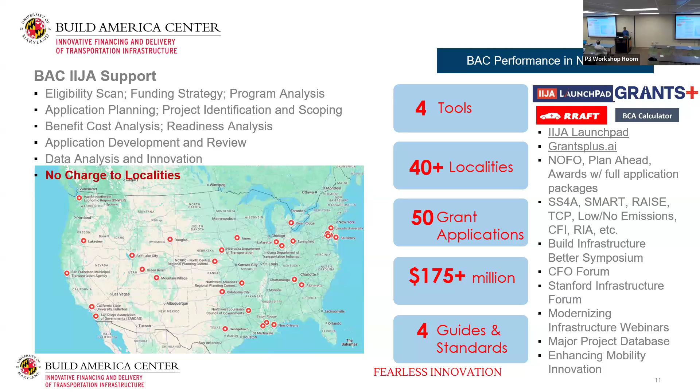Since then, we have been working on multiple projects. A few key activities launched were the IIJA Launchpad and Grants Plus AI tool, and we have helped in getting more than 50 grant applications for local and state DOTs, securing more than $175 million worth of federal grants for these agencies.

One of the key activities, known as Build Launchpad, has been rebranded as IIJA Launchpad. It has coverage of recent awards and federal grants across the US, looking into 1,000 plus awards, 4,000 plus localities, and key application documents that were successful in getting the federal grant awards. The website is balaunchpad.com.

Another tool recently released is called grantsplus.ai. It's an LLM-based tool which agencies can use to see how easily they can avail federal grants, looking at local matches, funding sources, innovative finance, and accelerated delivery.

We do conduct lots of capacity building workshops to agencies, to student community, to industry professionals in terms of workshops, symposiums, seminars, webinars. In 2024-25, we had around 25 plus events happening across the US in multiple modes, and 1,000 plus attendees were part of these activities.

We have a YouTube channel. BAC holds a YouTube channel. You can search for Build America Center YouTube channel. It has 60 plus short videos on grant application procedures, how to work with FHWA, looking at the state infrastructure bank, regional infrastructure accelerators, and other topics.

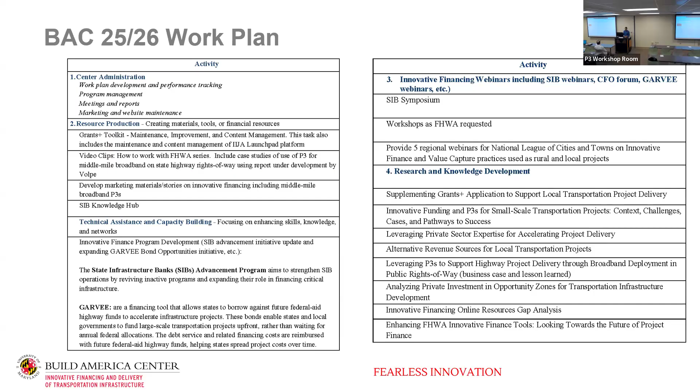For the 2025-26 work plan, we recently got this approved, and multiple projects have been taken care of, including alternative revenue sources for local transportation projects, leveraging P3s, innovative financing resources, and enhancing FHWA innovative finance tools.

Our center director, Qingbin Cui, could not make it today. He can be reached at cui@umd.edu or bac@umd.edu.

One final update: BAC has recently published a value for money analysis principles and standards, because it was part of IIJA principles that each project should undergo a value for money analysis. BAC has released a report and checklist for how to conduct value for money analysis.

That's about BAC. So now I invite Professor Sinha to give a brief keynote. It says keynote address, but it's not really a keynote address, it's just an introduction. For those of you who do not know me, I've been at Purdue for many years, 51 years. We have visited many of these things we are talking about for years and years.

We work with the Indiana Department of Transportation, mainly through the Joint Transportation Research Program. As a matter of fact, I take credit for the highway charges we have in Indiana. That was set up by us. People often wonder what engineers have to do with financing, but there's a lot of engineering in it. We have to figure out exactly how much to charge whom, truckers versus automobiles. There comes the engineering: how much damage the different vehicles create, and how much it costs to fix that damage through maintenance and rehab, you have to allocate them. So there's a lot of art in it, also science.

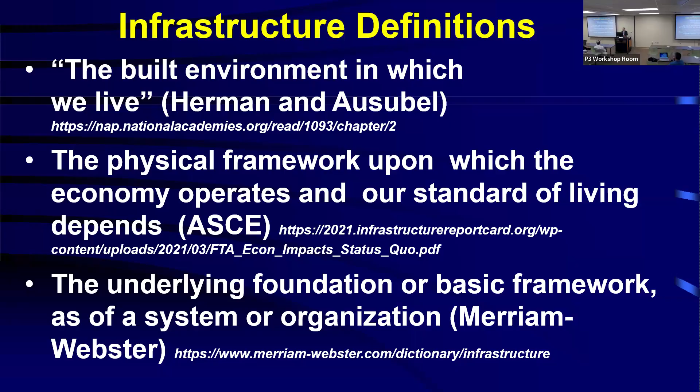ASCE has a good one, and even Merriam-Webster has very good definitions, and this is one of them. And how about financing through public and private?

I think originally, not too many years ago, we had the Soviet Union, the former Soviet Union, where 100% of their infrastructure was publicly financed without involving the private sector, not even as contractors, because the contractors were also public. So all the contracts, instead of competitive bidding, were awarded through negotiations. The idea was to give a piece of the cake to everybody, spread the money, and try to do the work that way. After so many years, it was found out that it does not work that way. There are many issues.

We all know that the end of 1991 was the fall of the Soviet Union. And then the World Bank at that time invited a few people to constitute a new department working with the 15 republics of the former Soviet Union.

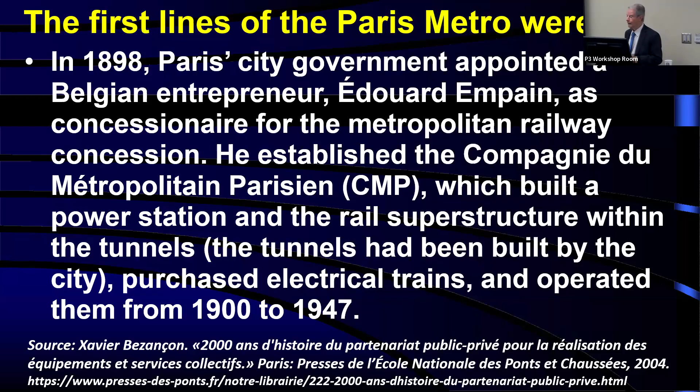Some examples: in 1898, Paris city government appointed a Belgian contractor entrepreneur, Edouard Empain, as concessionaire for the metro of Paris. There's a very good description - I have not seen any translation, but in French there's a very good description by Xavier Bezançon, '2,000 Years of PPP History.' So if you want to know more, I suggest you have a look there.

Years ago, I was asked to help the Norwegian Public Road Administration launch a huge PPP program on their west coast. If you remember the map of Norway, the west coast is famous for their fjords - the sea, the North Sea, goes into the continent. So what happens if you want to build a north-south road? Norway wanted to connect through PPP, north-south on the west coast, so you have to cross those fjords. It was a huge challenge, and they asked me to help structure it as a PPP.

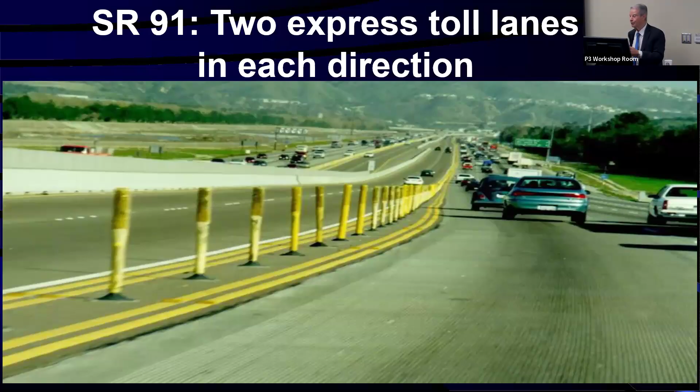Not peak hour, you go there, so you can drive very comfortably in the express lanes because basically there's no traffic, so you are paying for almost nothing. A little later, during rush hour, the price is higher - it's dynamic pricing. The price now is higher, but still it's really worth it, although many drivers believe it's not. So if you choose to pay, you take the express lanes. If not, you have huge congestion. So it's the market working.

Sam, going back to Ghana, you saw this before, and you have been there. I know - this was my first World Bank mission to Africa. I went to 3 countries: Mauritania, Senegal, and Ghana. My first mission was June 1986, the year I joined the World Bank - my first work travel to Africa. And in Africa, one of the challenges we had is that the north-south road, as you know...

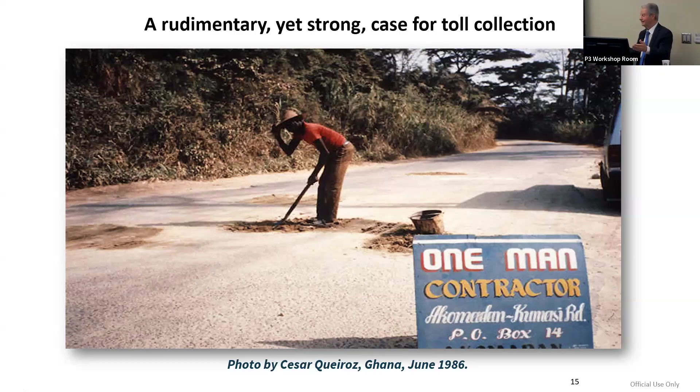Okay, finally we have a definition. So what's a P3? A long-term contract between a private party and a government entity, for example the Department of Roads or Highway Authority, for providing a public asset or service, in which the private party bears significant risk and management responsibility, and remuneration is linked to performance. So if the road is in poor condition, the government may not pay. That should be built into the contract. So a good PPP contract will have a set of performance indicators that must be met by the private sector to get their money.

The life of a PPP project typically has been between 20 and 30 years. Could be longer. The principle is that it should be long enough for the private sector to have the incentive to invest well, to do a high quality initial construction, because they'll be responsible for maintenance for many years.

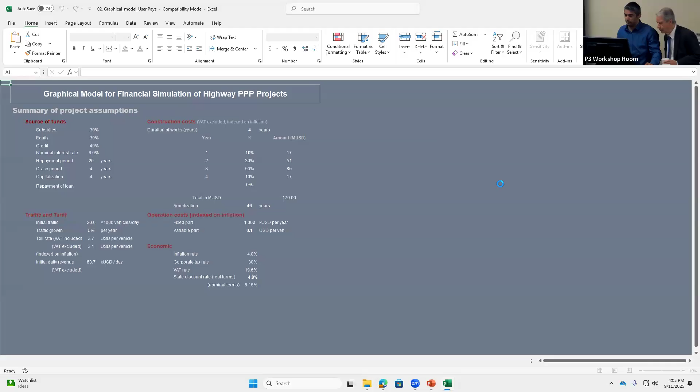So we are talking about the file graphical model User Pays - the graphical model, operate V3. This already has macros enabled and ActiveX controls enabled. This will be the starting screen, and you have 5 sheets in it called data, cash flow, debt, dividend, and results. We start with cash flow, where you can adjust all the key parameters - concession term, construction cost, road length, split up of the construction, operating expenses, and other details.

What we want you to do is adjust the information below on the concession. Could you do the first one - concession life, it is 50 years now. Let's try to reduce it to maybe 30. Everybody, if you have it open, can you try to start with the concession life? Let's put 30 years, can you change it to 30? If you get a bad message saying you are not a good person, then you have to close the model and reopen everything again.

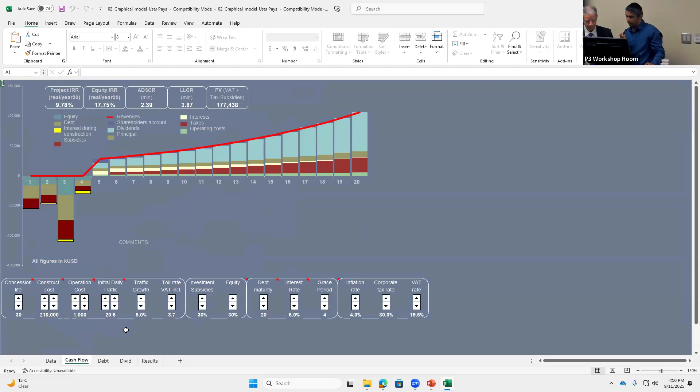So the values, and sorry, where do you adjust the concession period? Is it on the first slide? Yes, first. Concession period and most of the parameters are in the second sheet, in the cash flow statement below: concession life, construction cost, operations cost, daily traffic, and remaining. I've seen it, thank you.

May I ask, road length, I've not located that yet. It's probably very obvious, but I'm missing it. Sorry, I didn't get you, which document? Road length, the parameter road length parameter, where is that set? Oh, the road length is not in the model.

We wanted to keep the model as simple as possible, to be user-friendly. As a result, some of the calculations you have to do outside of the model. So we will get to that point, but for the time being, please focus on including in the model all the data that was provided, so that you are adjusting or adapting the standard model to your project. That's how you make it fit to your project. In this case, the capital cost takes care of the road length, so we don't need to adjust the road length. The capital cost is indicative of the road length, it applies to the entire road length. Thank you.

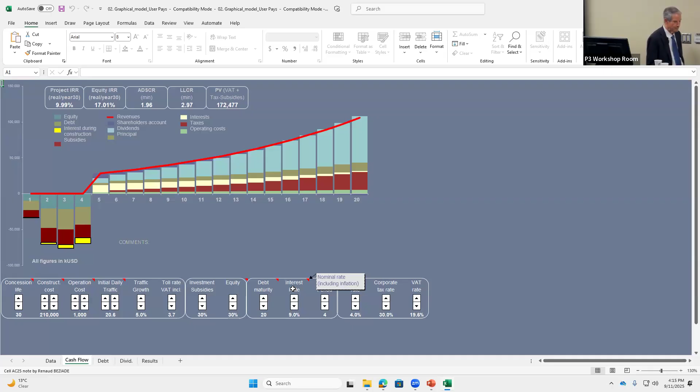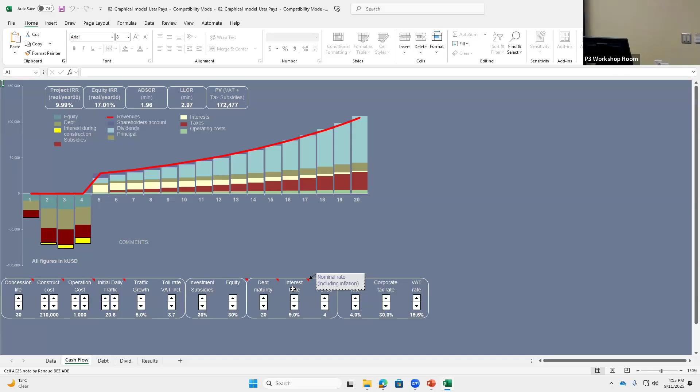Could you tell us where the field is for the loan repayment period? The loan repayment period, you need not include directly, but your total debt maturity can be 19 years. The debt maturity of 19 years is a sum of the grace period and the repayment period. So there is no specific field for the loan repayment period as such, you only need to key in the grace period and the maturity.

Could you go over again how the construction cost percentages work? I'm having trouble figuring out the first years. For the construction period and the cost, go to the duration of works in the data sheet. There are large boxes, and if you click on the left of the large box it reduces, and if you click on the right it increases. You can keep year one unchanged, there is no option to change year one, but year 2, 3 you can change.

Perfect. Thank you. Hello.

Hi, can you please check the repayment period? It seems the subtraction is not working. For debt maturity minus grace period, it's not giving me 15. Grace period is 4 years and the debt maturity is 19 years. The repayment period shown in data is 19, but it should be 15 -- the repayment period is 15, you added the grace period. You have 19 including that, yes including the grace period. The subtraction formula needs to be corrected.

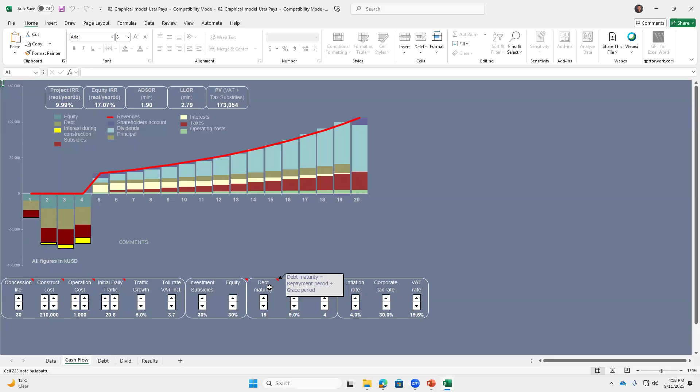So you were talking about the repayment period in sheet 1, right? It still shows 19 years because I think here it covers the entire period of repayment, so it need not change -- these are non-editable fields, so it can stay like that.

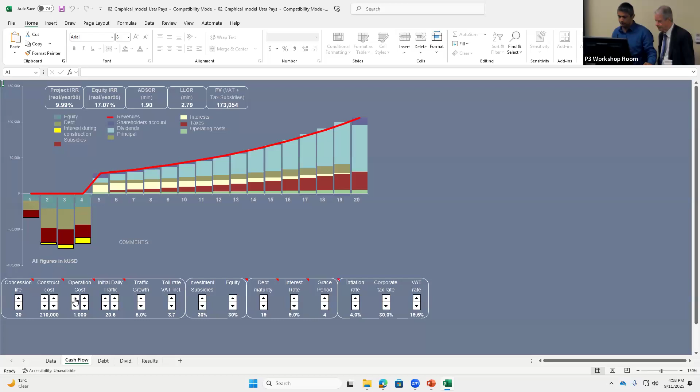Hello. Yes, this is Andrew from Uganda. I want to know, how do you input the discount rate?

The state discount rate is in the first sheet, the data sheet. It has to increase to 8%. In real terms, it's 8%, so we increase it to 8. So in nominal terms, it will be real terms plus the inflation rate, plus a factor combining the real terms and the inflation rate. So you will get 12.32.

Hello, please. Where can I reduce the operation cost? I've gone so high, I want to bring it down to 1,000.

You can increase it to 10 million. Okay, operation cost 10 million. Okay.

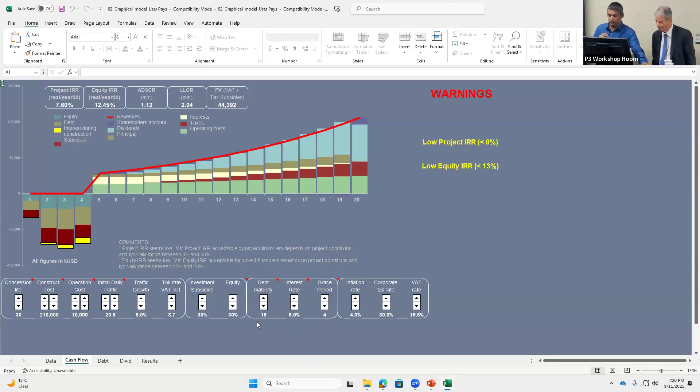Where is the loan repayment period adjusted? Can you remind me of that? The loan repayment period is adjusted in the grace period and debt maturity. The loan repayment period itself does not have its own table. You can just adjust the debt maturity as 19 and grace period as 4 years.

Thank you. Sorry, I'm a bit confused with the operation costs because I put 10 here, I changed it to 10, but I see the figure of 10,000. Do I need to remove these 3 zeros, so it remains only a figure of 10? On the second sheet, operation costs.

Hello? All figures are in thousands, so it's 10 million. Ah, okay, okay. Okay, KUSD. Thank you.

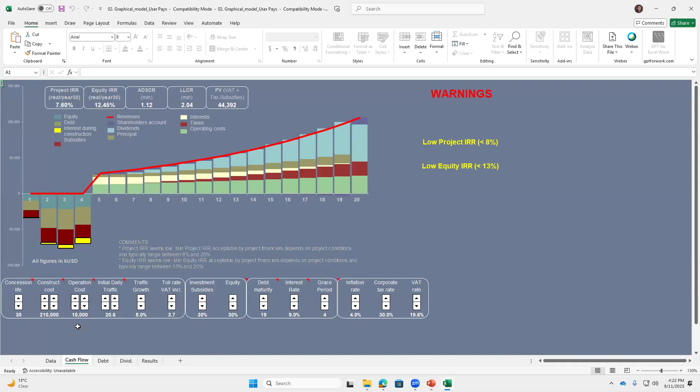Please, where do I reduce the grace period from 5 years to 4 years? There's a section called grace period where we can change it to 4 and 5.

The private sector will not get any loan with a grace period lower than the construction period, so they will be relying on that, rather than calculating a lot of the principal without proper money calculation. So, okay.

4%, 30%, 19.6. Okay.

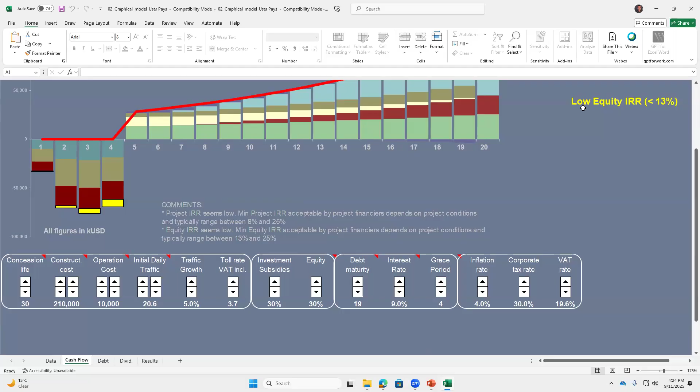Could you explain the difference between the project IRR and the equity IRR?

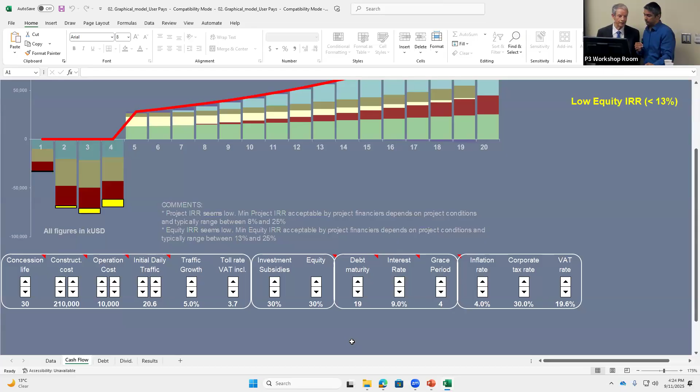Yes, we'll come to that shortly. Let's first customize the model to our project. Okay, so let's enter all the data. Please don't do any calculation so far. If we enter all the data correctly, then we can compute all together, and we're going to get to the right answer.

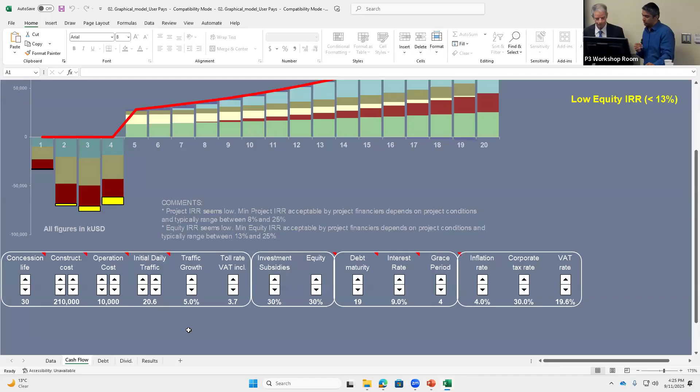So let's look at the second sheet, change the equity to 30%, and investment subsidies is 0, which means we will have a debt of 70%. That's right. And traffic composition 70, 25, and 5.

Before that, initial traffic for year 1 is 20,000. So far, let's only put the 20,000 because the other data we don't need for the time being. We are entering data only where the model requests the data.

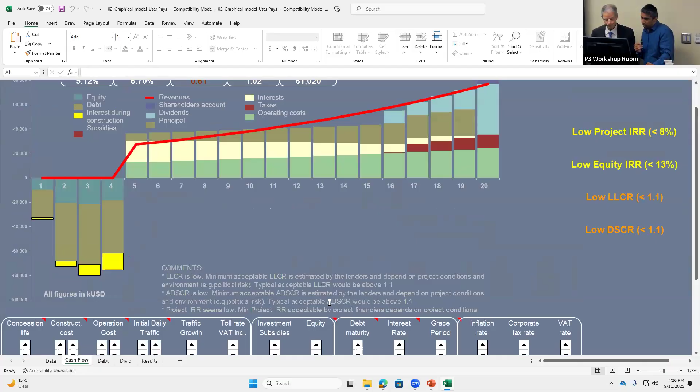20, and traffic composition 70. Traffic growth 3%, we have entered. And traffic split, no need to change. Okay, traffic split, you can skip, not yet need to change, so we don't need that for the time being.

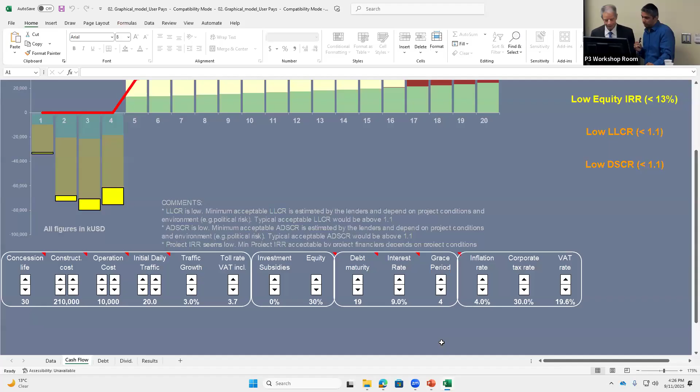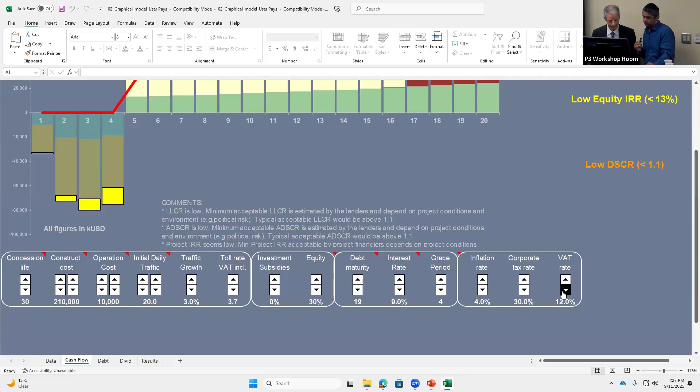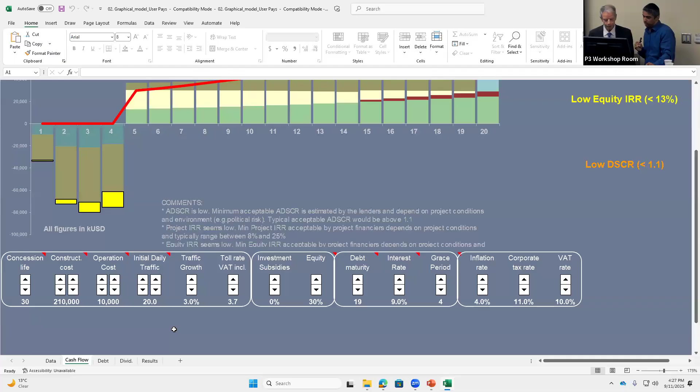Okay, and amortization period, you have to go back to the data sheet, and it is 26 years by default. No need to change.

Has everyone reached the stage of setting up the model for our project, before going into the targets? Yes, before worrying about the target, let's make sure that we have all the data.

So, the cash flows, you can check here at the bottom line. You should have all this data. Oh, the toll rate does not matter - we have 3.7, but it doesn't matter because the toll rate is going to get affected. So don't worry about the toll rate. But all the other data in the cash flow, at this stage, we need to get all on the same page.

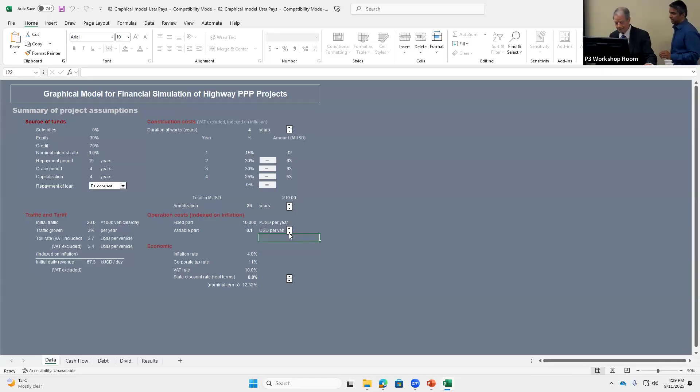Oh, variable part should be 0. Yes, thank you, good eyes. Colleagues, please remove it. Look here, variable part of the maintenance cost should be 0. So instead of 0.1, I should have 0. I think this model works only with the fixed part. Oh, I got it. Good, so yes, it should be 0.

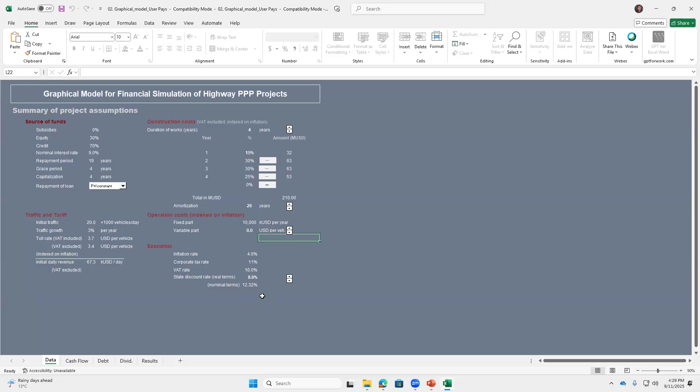What else? You have 12.32%. So in practical terms, the state's rate in nominal terms should be 8 plus inflation. 8 plus 4 is 12%. The 0.32 is a refinement, obtained by the product of the entire formula. The correction is the product of inflation times the rate in real terms.

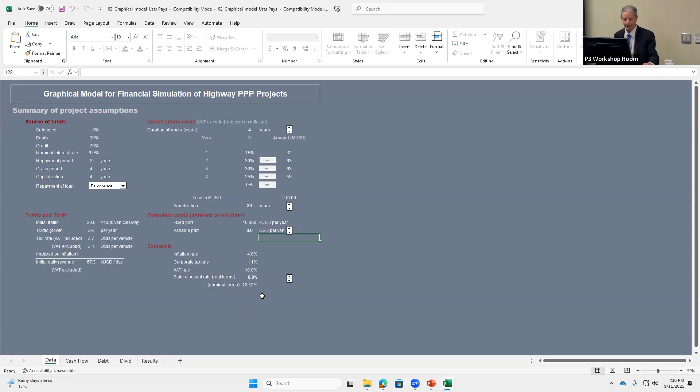And I have a question. Yeah.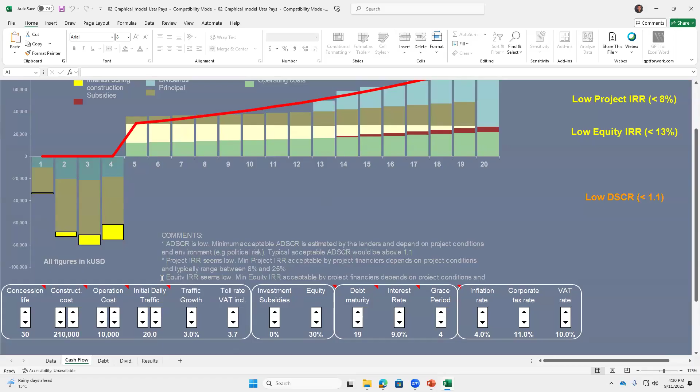And where do we enter the traffic composition? Traffic composition, no need to enter in this, the total price - I think there's something wrong with the microphone, we can't hear you. Sorry, the traffic composition, no need to change now. You need to look only at the total volume of 20,000 in the initial daily traffic.

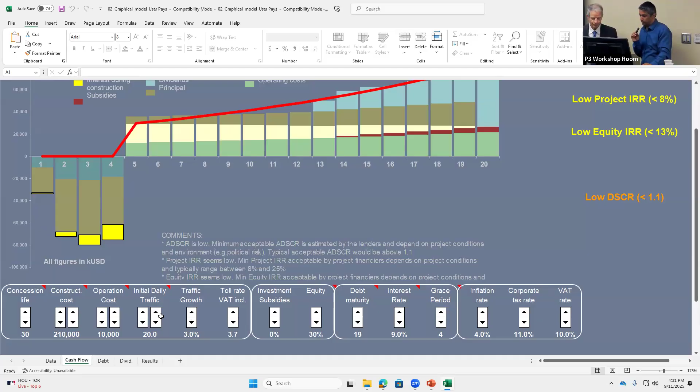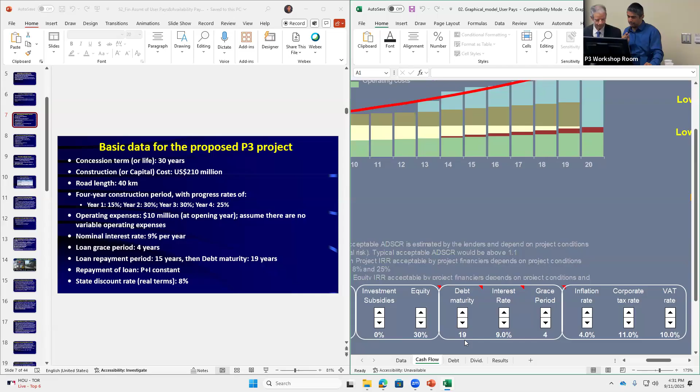Let's do a final check on the cash. Okay, so if I look at these sheets, I'm finally checking: concession life is 30 years, construction cost 210 million, 4-year construction split 15, 30, 30, 25, operating expenses 10 million, nominal interest rate 9% per year, loan grace period 4 years, debt maturity 19 years, repayment of loan is under P plus I constant, meaning principal and interest total remains constant in a year.

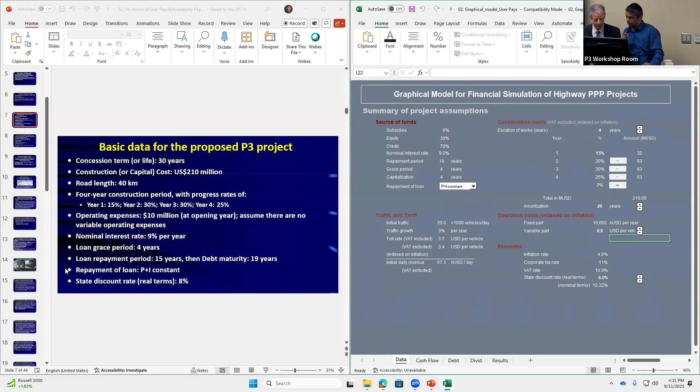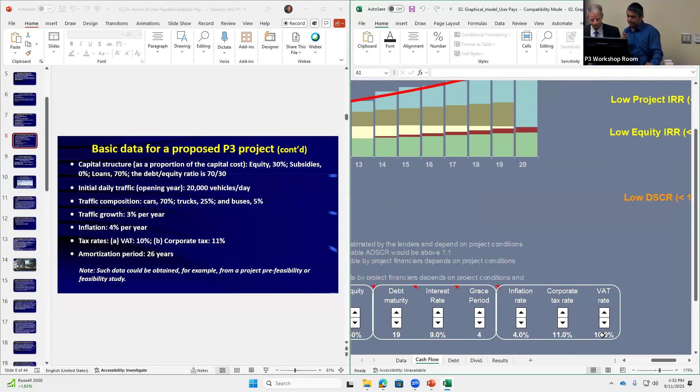State discount rate kept as 8%. The next sheet will have a capital structure of debt equity as 70-30. Initial daily traffic will be 20,000 per day, traffic growth of 3% per year, inflation of 4% per year, corporate tax at 11, VAT at 10, and amortization period 26 years in the first sheet. So basic model, the project has now been set for our conditions.

So now the first question was, at what toll rate? Financial indicator targets, okay. So we are looking into the financial indicator targets. Maybe you can explain that, thank you.

We can't hear you online. Can you hear now? That's much better. Thank you, is it okay? Yes, yes.

So I was saying that now we have the two targets: return on equity at least 12%, and at least 1.2 for the ADSCR, annual debt service coverage ratio. So with those two indicators in mind, let's memorize them. So we can go to the cash flow. Let's go to the cash flow.

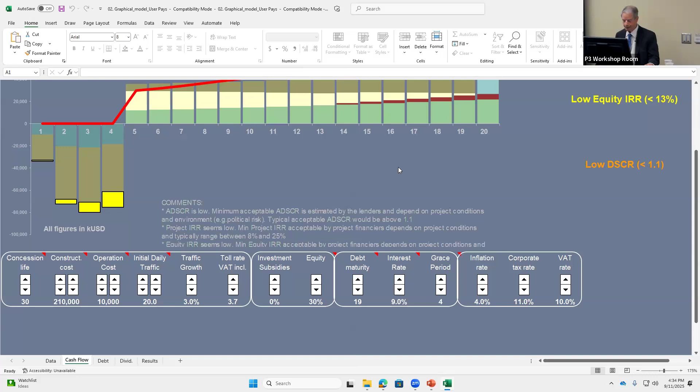So if we have all the data, let's see the indicators. We're not talking about the other indicators, like project internal rate of return - forget that for now, it's helpful but we don't worry much about it. Our two critical indicators are only these two: the equity IRR, which is 9.69, now it's too low. And the ADSCR - we need 1.2, and it's now 0.74.

So what do we have to do to get the right indicators? The only variable now - we have an equation with only one unknown, which is exactly the toll rate. That's the unknown. What's the minimum toll rate required? So 3.7 is too low because the two indicators are too low.

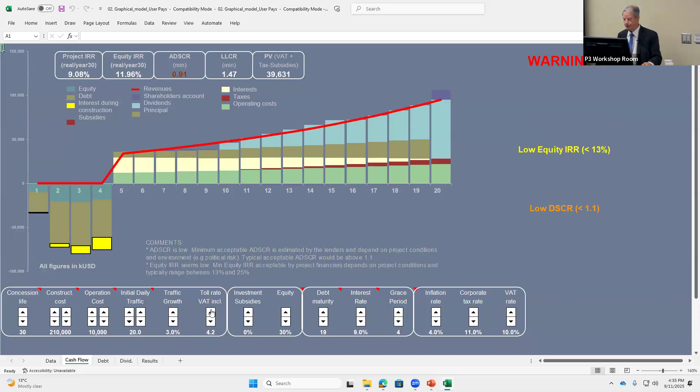So let's increase, and you can increase with me. Let's increase the toll rate so that we can increase the two indicators. The equity IRR is now 15.29, but I keep increasing because the ADSCR is not good enough. So I have to increase more.

Oh, now I'm in good shape. You see, we have to check the minimum. Now both indicators are above the threshold required - equity IRR and ADSCR. But let's see if I can go one notch down, because the question is, what's the minimum? But if I go one notch down, ADSCR is 1.19, so not enough. Let's go up.

So I have here a toll rate of 5.1. How many got that toll rate? 5.1, 5.1, okay we're unanimous. Congratulations in person. How many of the 200 online? We have several online colleagues - did you get 5.1 toll rate? Yes? Okay, excellent, congratulations to all of us. We got it, 5.1. So how are you doing time-wise?

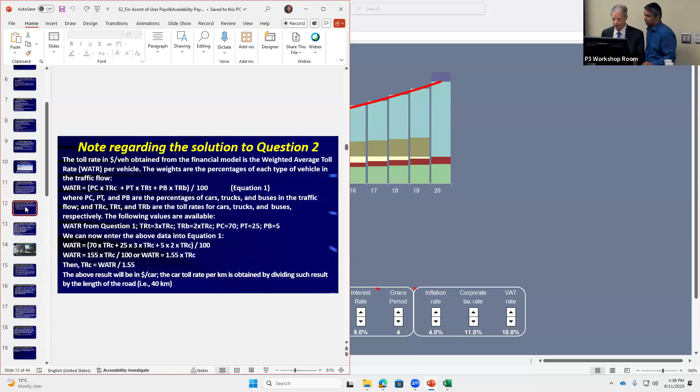So let's go to question 2. Please estimate the minimum car toll rate. Now we go to those percentages of cars, percentage of bus, percentage of truck - the car toll rate in dollars per car. I also want the dollar per car kilometer. So if I find the dollar per car and divide by 40 kilometers - I think we had 40 kilometers - I can compute the dollar per car kilometer, okay?

For the project to be able to attract private investors, please assume the following relationships between toll rates: average truck toll rate, assume that will be three times the car toll rate, and the average bus toll rate is going to be twice the car toll rate. So keep in mind this equation, 3 times for truck and 2 times for buses. Next.

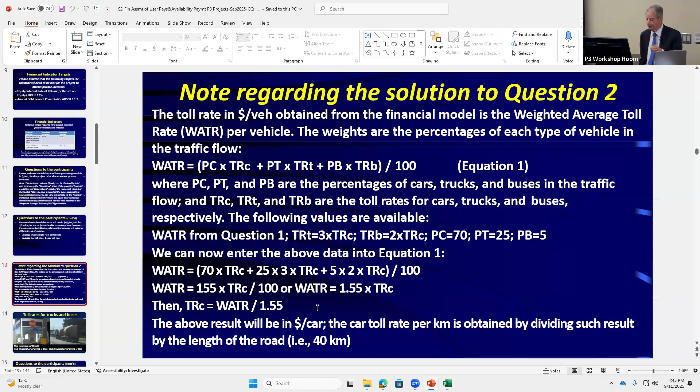Countries differ in terms of equivalence between cars and trucks, between cars and buses. I assumed here that it's a simple number. No, we assumed 3 times for trucks and 2 times for buses. But it depends on the country. Like in Brazil, for example, in most of South America, the relationship is based on the number of axles.

So here, the toll rate for commercial vehicles is based on their axles, same as the toll rate for a car. A simple equation: the toll rate for a truck is the number of axles times the toll rate for a car.

And other countries have different approaches, like here in the US, different concessions have different equivalencies. In South America, it's mostly standardized. In Europe, you have variations country by country.

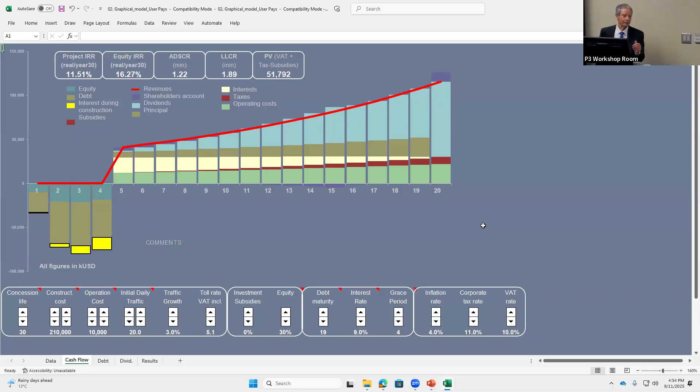It depends on the number of vehicles per day, and you use a fictitious toll rate, which is agreed during the bidding process. This means the private sector will have money each year that may be different because it depends on the traffic. It was the first major highway in Latvia, between Sigulda and the capital, Riga.

And so there was no environment, no acceptance by the private sector of shadow toll. So the only option became the availability payment, which is made by the government irrespective of how many vehicles per day. Okay?

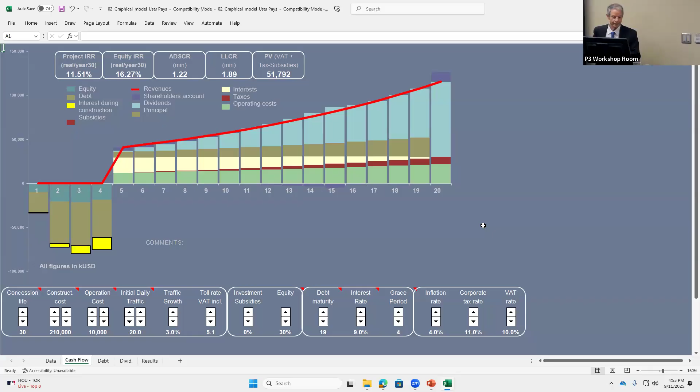Colleagues, I think we can move. I'm very happy. Let's move to, please help. Let's move to availability payments.

For that, I request you to open the next sheet, the sheet titled Financial Model for Availability Payments, number 5.

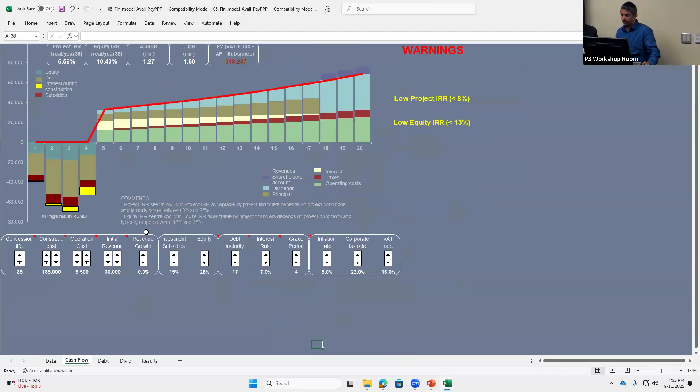Okay, the process, the larger bit. The process is almost similar to what we did last time. You will be having a set of parameters.

So let's go through the question. You want to explain the concept? Yes, I think we do. Let's do a refresh here.

Availability payment is a form of PPP where the public sector pays its private partner, the concessionaire, through regular payments, usually annually, could be half-yearly, during the operation and maintenance phase of the contract.

Based on the PPIAF World Bank Toolkit for PPP roads and highways toll road financial model, which you already know, we developed a model to assess financial feasibility of availability payments, which is applicable because there's no toll rate involved. So it's applicable to roads, rail, airports, ports, schools, hospitals, buildings, and prisons.

A numerical example - let's go to the numerical example. Question 1. To answer any question, the first thing we have to do is enter the data for this project, but let's see the question first.

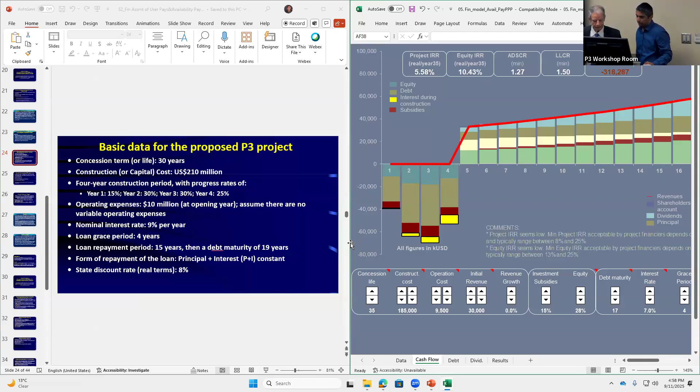Okay, I'm gonna - do I have some now? Yes, yeah, okay. Let me dictate to Deepak and he's gonna enter it into the new model. So concession life, 30 years.

Construction capital cost, 210 - I saw that number before. Okay, 4-year construction period. Split - forget the first year, go to year 2, 30%. Year 3, 30%, and year 4, 25%.

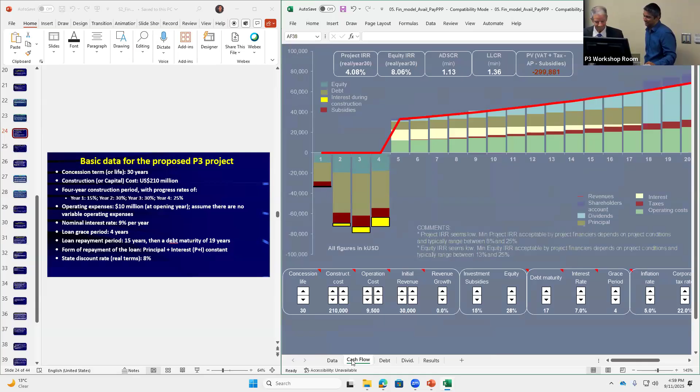The computer is very smart - it knows that the sum should be 100, so it computes year 1. We got it? Yeah, can we go to operating?

Operating - this operating expense is O&M: operating, maintenance, even rehabilitation, annual equivalent. So operating and maintenance expense, 10 million. There are no variable operating expenses.

I think we already - can you see the, yeah, we don't - I will eliminate, okay, good. And nominal interest rate, 9%.

Nominal interest rate, 9%. Loan grace period, 4 years. Loan repayment period, 15 years. Debt maturity, 19 years. It's already there.

Form of repayment of the loan: principal plus interest, P plus I. What's the other option? Can you try linear? Let's go to debt. You see, if linear, it decreases like that.

If you put P plus I, it means the principal plus interest is constant. Fixed EMI every month, fixed payment every month or every year. Usually it's a year. If you buy something by credit, you probably pay monthly.

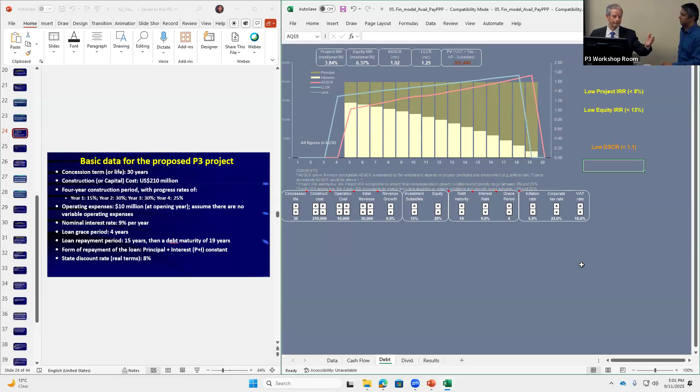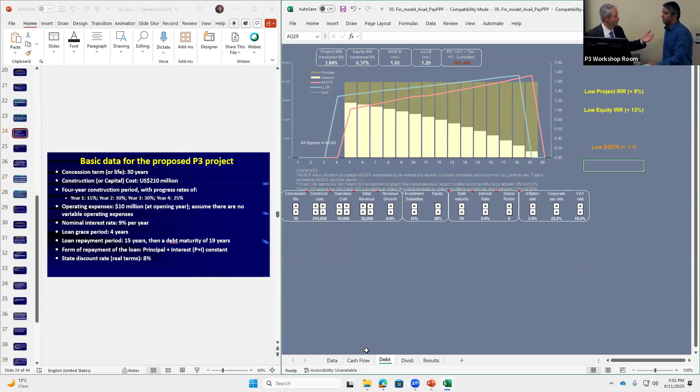But when we talk about infrastructure, the scale is bigger, and usually we're talking annually. When we did calculations for the Federal Highway Administration, they didn't like this model. We had to split into half-year units because they wanted to structure their financial models that way. But as far as I'm concerned, the rest of the world is happy with 1-year units, except in India, where payments are made every 6 months.

Discount rate. State discount rate, 8%. So 8% state discount rate, real, 8%.

And inflation, how much inflation? We didn't do inflation yet. Inflation 4%. So we have to correct for inflation, 4%.

Now we have the capital structure. So investments, subsidies are 0. Subsidy is 0 and equity 30%. The computer does not want you to add the debt because it knows that the sum is 100%. Debt plus subsidies plus equity is 100%, so you stop there.

So I think we entered everything. Revenue growth rate is 0. Corporate tax and VAT. Do we miss anything? Yes, the tax rate. Corporate is 11% and VAT is 10%.

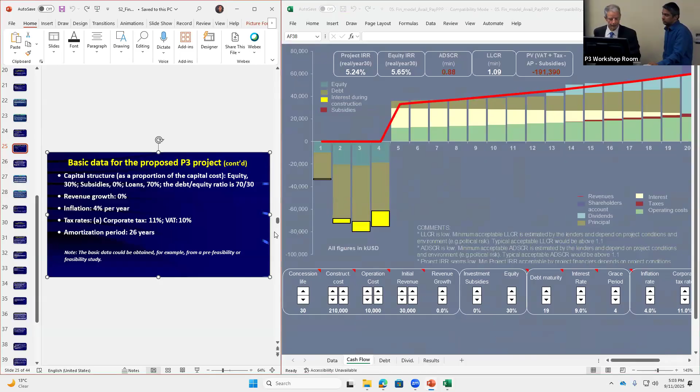Yes, so I think we entered everything. Everybody on the same page? I think we entered all the data. So maybe let's enlarge now the cash flow, and let's see the indicators, the constraints.

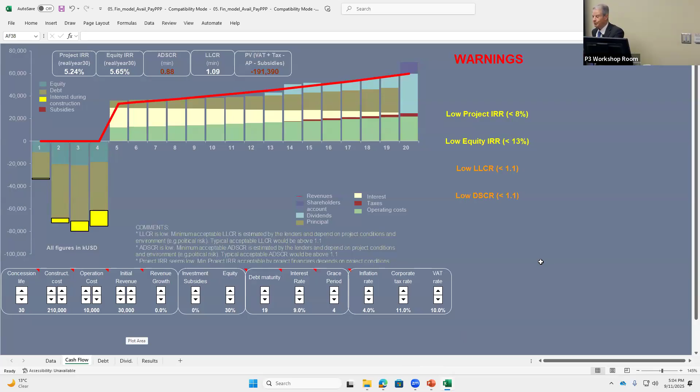We want the constraints to be the same as before. We know those numbers: 1.2 and 12. In your view, is this exercise for a developing country? Both indicators are relatively high, so yes, it's a developing country. Okay, so let's do the calculation.

So the indicators are not very good. Equity is only 5.6 and ADSCR is red. We don't like that. In this case, we don't have a toll rate to increase, so we have to increase the initial revenue, which is the availability payment in year 1 of the O&M period.

So we have to increase it. You can use the right arrow or the left arrow. If you use the right, you jump quickly. It was so low that we can use the right. Now I satisfy the ADSCR with 1.21.

But what happened to equity? We need more, so let's go slowly now. I'll use the left arrow, which moves slower with finer jump intervals, so we can fine-tune. Let's go here, we have to go to 12%. Oh, 12.00, coincidence, 12.00. So we stop here.

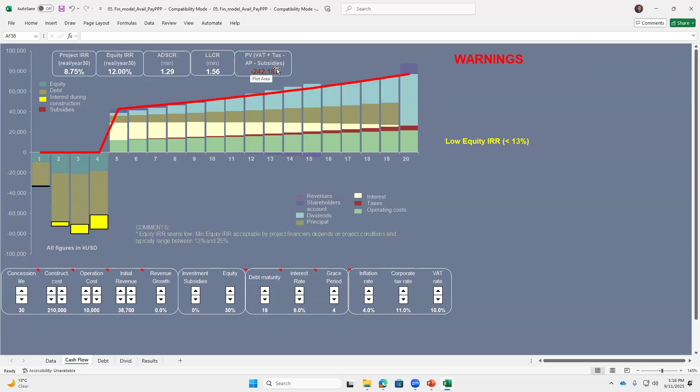That's the present value for the government, for the Treasury. So with this project, the government will be paying 38.7 million each year, adjusted for inflation each year, during the O&M period of the project. It's a lot of money.

Okay, and this will accumulate in the model computes. I said that the two critical indicators are the second and the third, which is true. Critical, but everything is important. This is very important for the Treasury, for the Ministry of Finance, because it gives a diagnostic over the life of this project.

But if you go, you see the same number there for the toll road, for the previous project, the previous model. Let's not open it, because you believe me, okay? But if you want to open... yeah, believe but doubt. So if you open for the toll road, what's going to be there?

Is it going to be red or is it going to be white? This is going to be white, because the government makes money. Because the government charges tax to the private sector, to the concessionaire. And the concessionaire gets the money from the users.

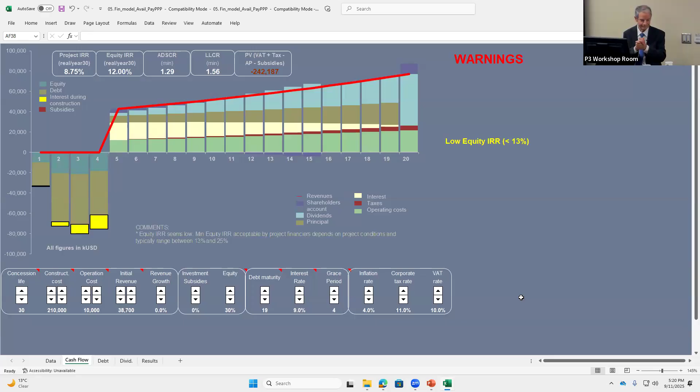Okay, but then I decided to change the approach. So now that I trust you, and you trust me that we can get good results, you have the answers direct. So exercise number 3, you can introduce the model - maybe for 5 minutes you can. Let's go, yeah, let's go. Can you help with this?

Good, good. Thank you. So let's go, please, to numerical exercise example 3: assessing the financial feasibility of an availability payment railway concession.

We will estimate the minimum annual availability payment that will be required for a railway project to attract private investors.

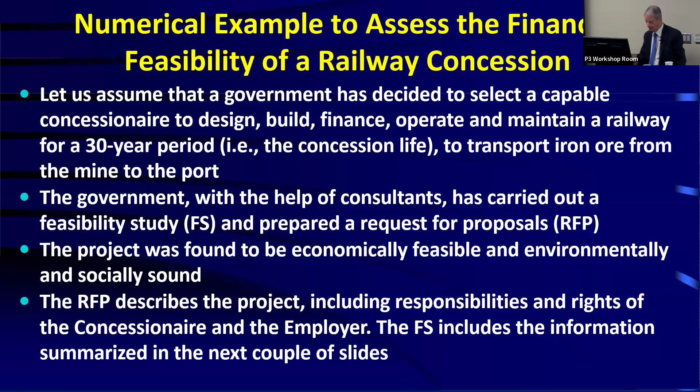The railway concession data is as follows. Concession term is 30 years. Capital cost for construction and equipment is $500 million. Capital investment period is 5 years, with progress ratios of year 1, 15%, year 2, 20%, year 3, 20%, year 4, 20%, and year 5, 25%. The amortization period is 25 years. The annual equivalent operating and maintenance cost is $90 million per year at the opening year, then adjusted for inflation in subsequent years. The capital structure is equity 25%, capital investment subsidies 0%, loans 75%, so debt-equity ratio is 75-25, and revenue growth is 0%.

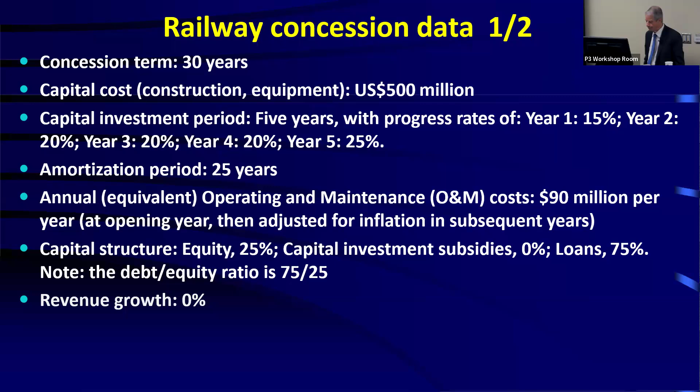The nominal interest rate is 6% per year. The loan grace period is 5 years. Loan repayment period is 13 years. The maturity equals repayment period plus grace period, so 13 plus 5 is 18 years. The state discount rate in real terms is 6%. Inflation is 3% per year. Tax rates: corporate rate is 20%, and value added tax is 15%.

Thank you. So we are back in our routine. Let's now enter the data so we can answer the question: we can calculate the availability payment. It's the same model we used for exercise 2, the availability payment model. So let's enter this data. Should we do it here? We don't have time, but I think by now you know how to do it, right? It's the third time, and given the time elapsed, why don't we just see it here?